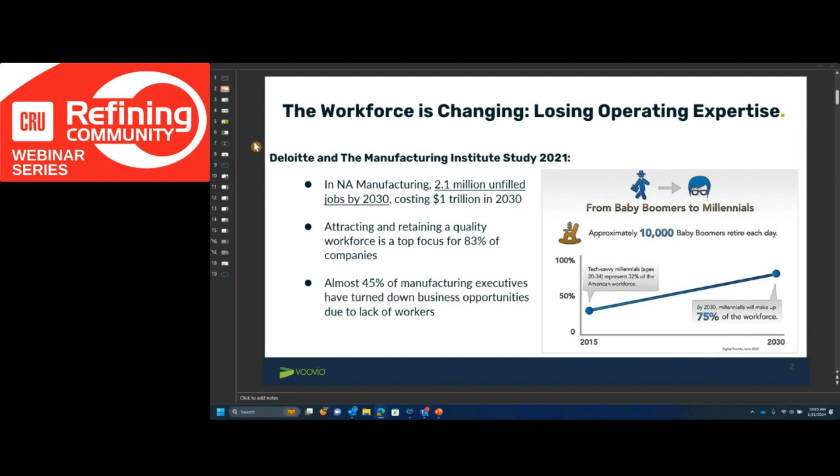So let's talk some more about some of these challenges the sites are seeing, specifically with the baby boomers leaving the workforce and the new generations moving in. What our customers are telling us this transition is causing them is a significant loss of knowledge. Within the industry, it's referred to as tribal knowledge. It's that knowledge, those process nuances where when you need to start up the plant or bring the plant to a hot idle, it's those nuances that only a few people know.

So that's challenging the plants on maintaining the high levels of production. It's creating a lot of inefficiencies with those few subject matter experts, because not only are these plants relying on those subject matter experts to keep the plant running, but those same SMEs are being asked to train the new employees in the plant process. So again, it's really taxing those subject matter experts.

In addition, when a new operator is onboarded, because the plant is running and because the SME is not always available to train those operators, what we hear from customers is when an operator is qualified in their job, they're probably only knowledgeable of that job less than 50%. We've heard numbers of 30%, 40%, because they're just not able to experience the starting up, the shutting down of equipment, et cetera. So what that leads to is we have inexperienced operators, ones that haven't seen the significant events in operation, training the next generation.

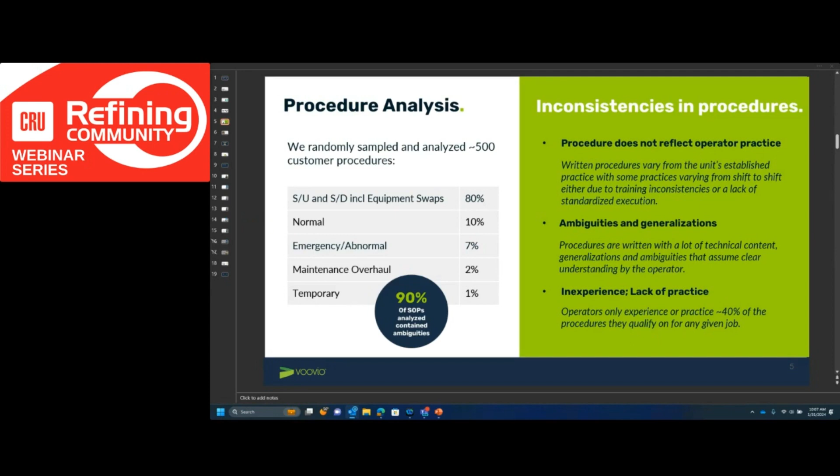So what we at Voovio identify as critical for the frontline personnel is procedure clarity, and we highlight that in the next slide. What that is are clear and concise actions. Think of this as a pilot's checklist. If an operator is going to perform a task, instead of ambiguous or general steps, clear, concise actions on what is supposed to occur in that next step, one action per step.

And then how do you enable that operator to visualize what they are supposed to accomplish in the field? So giving them the ability to visualize, building that muscle memory. And then lastly, it's learn by doing. We're going to talk a little more about learn by doing and the ability to build that muscle memory.

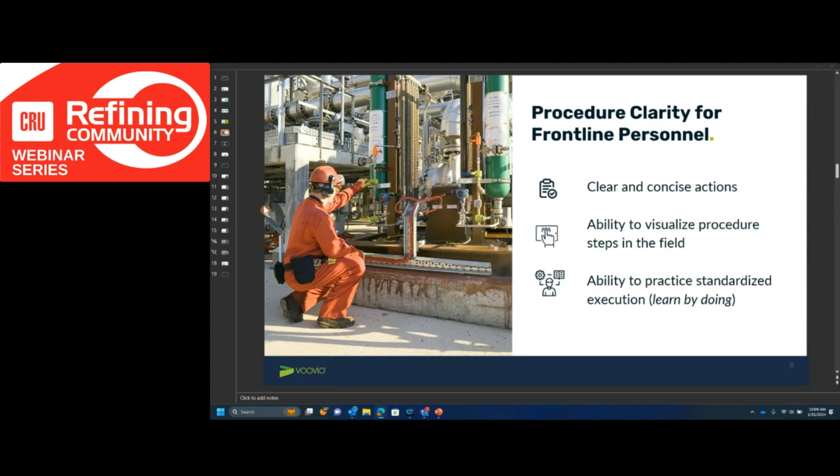But from here, I'm going to turn it over to Clint and let him talk about how Voovio builds that muscle memory within operations and frontline personnel.

Thanks, Fran. I appreciate all the front end input, and exactly as you said, we've been talking a lot, and I think most people know how difficult it is to learn in a new plant. Even people that have been in manufacturing for years, like myself, I'd go to a new plant, and until I was there 6 to 12 months, it was really tough to contribute until you've traced all the lines, walked out the unit operations, and really understand it.

So what we're going to show here is how Voovio is able to shorten that learning curve and make that material available at their fingertips as long as they've got access to a web browser. So I'm just going to show you guys quick the view of the system, the simulator, what we have.

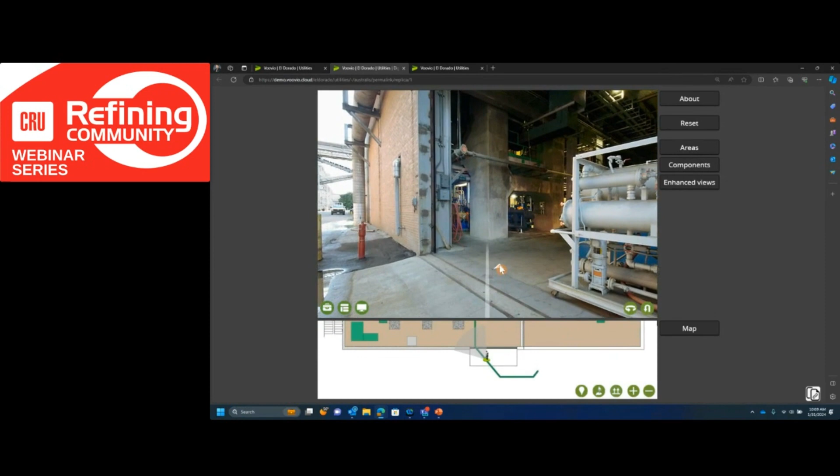So at its core, at its base, the foundation of the Voovio modules that we're going to build the simulator on is the digital replica. As you can see here, our replica starts as we walk into a unit. And you can see as I walk through, this is not a rendering, this is not a 3D scan. This is my plant, or a plant that one of you guys could work through.

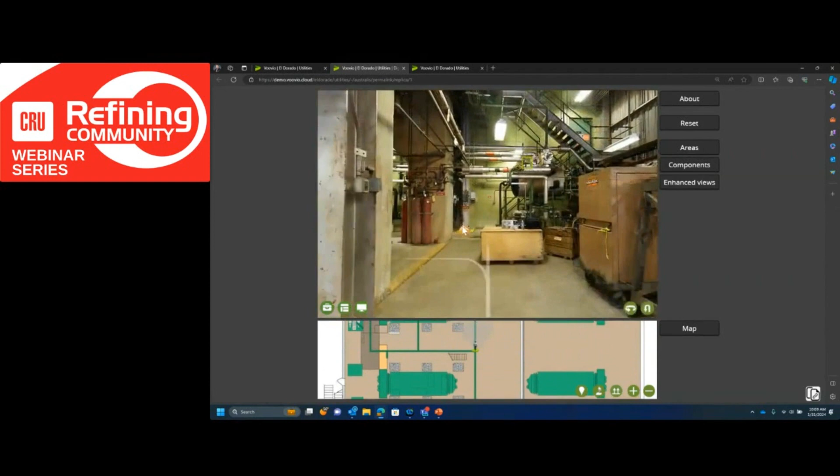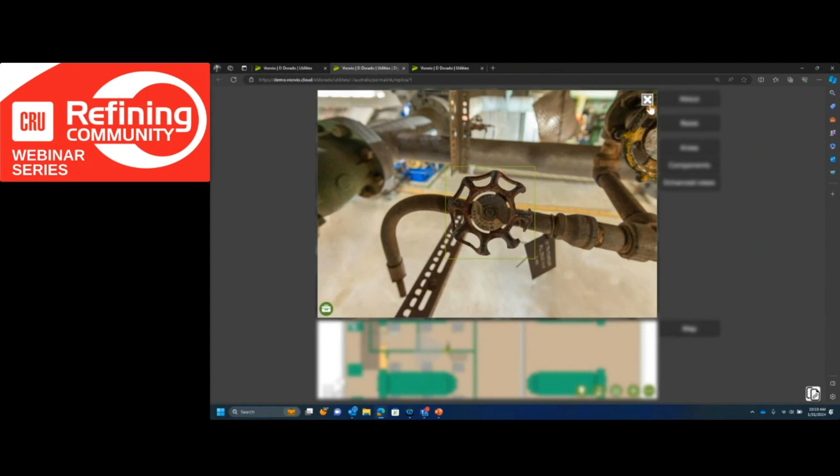That is one of the advantages of having Voovio, is that we use actual photographs of the equipment, which means operators will see and touch, remember, and be familiar with the equipment that they touch every day.

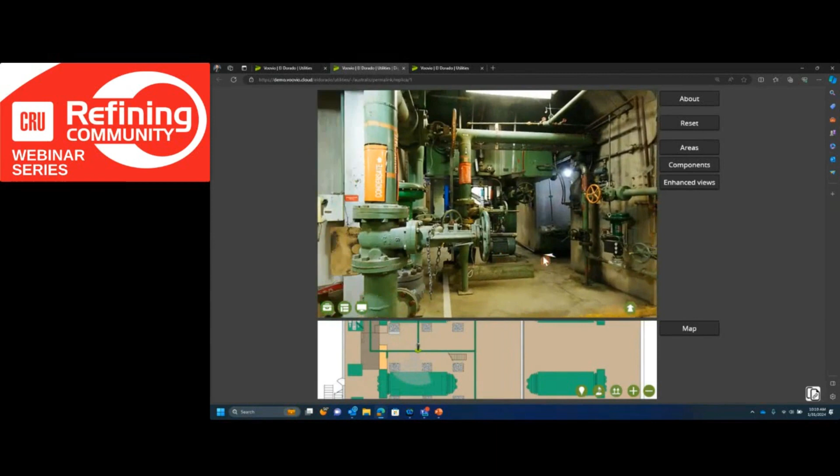In addition, we've got the capability to interact with this equipment. As you can see, I'm working with this damaged hand valve here. So we can go through, move. I've got the same degrees of freedom, looking up, looking down. I can stop, look around, see my entire plant as it exists.

In addition to being able to look at my plant, I can look up and search any of my valves, those valves with odd names from days gone by, or that have grandfathered names that may or may not make sense, or the upstream valve from wherever. We catalog and document all of the equipment in there, and it's also searchable.

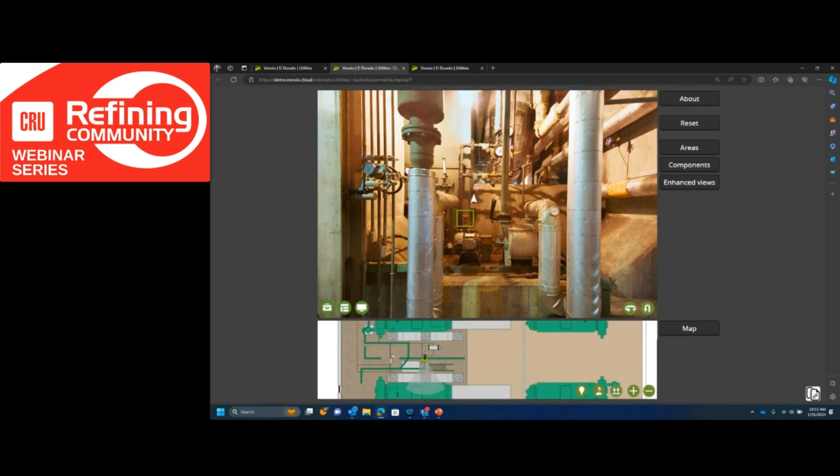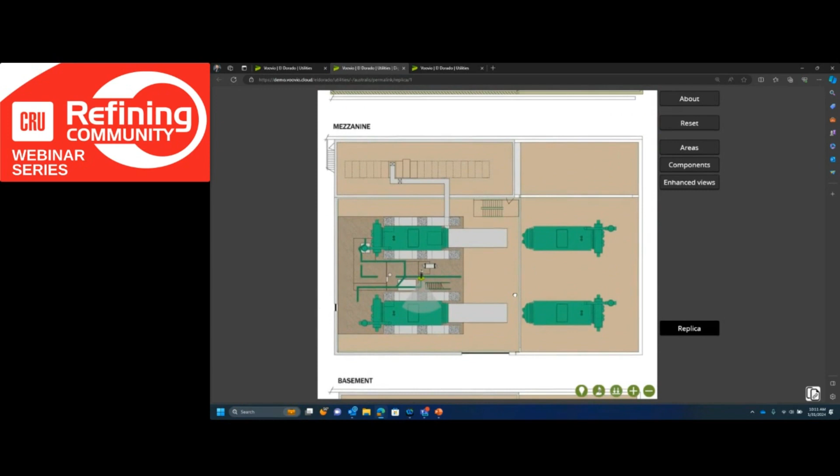So you can search by a tag ID. When you select such a valve, it takes you not only to that valve in the image, but also in the map view below. As you may have seen this map here as I was moving, this just helps orient the operator or user to where they would be in the plant, at the location that corresponds to the valve above.

Again, if you don't know the tag numbers, you can search for bypass lines, and all of the bypass lines would come up. You can select the valve you want, and it would take you to a manifold or a piece of equipment where that valve would exist, not only in the image, but also in the overview here.

So from locating valves, especially for new people to the area, or for infrequently performed actions or valves that aren't operated that frequently, you can see how this would drastically reduce time to procedure execution as well as learning for first time operators.

Another key element to Voovio, which really shortens the learning process, is what we call our enhanced views. These are extremely valuable for a lot of customers, because this is an actual use case from a customer we had, where they were training in an area that was extremely loud. They couldn't understand. So when the SME or the trainers would take the new employees to the area, train them, and ask them, hey, does that make sense?

Of course, everyone says yes, when they may or may not really understand it the way they need to.

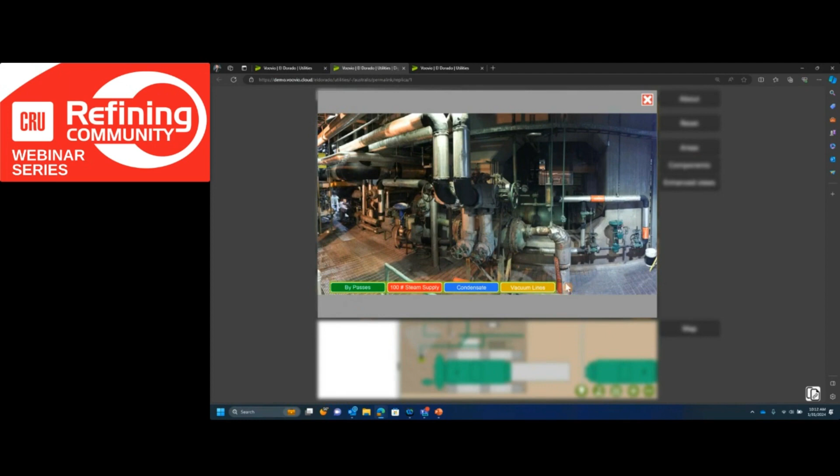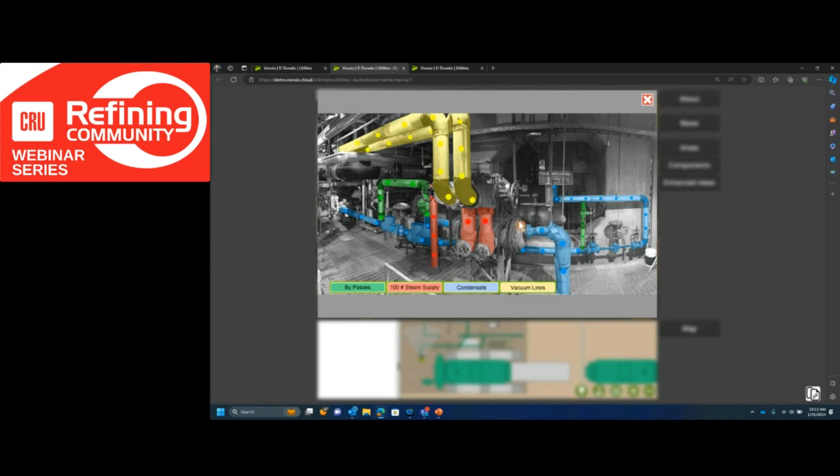But as you can see here, when we talk about the way the system would work, we can easily label these lines, and it makes it much easier to see how this process would work, where these lines could or wouldn't be isolated, and how the whole process works in general. So you can see how something like this would really help with onboarding or troubleshooting, in any event that operators would need to go out there and figure out what's going wrong.

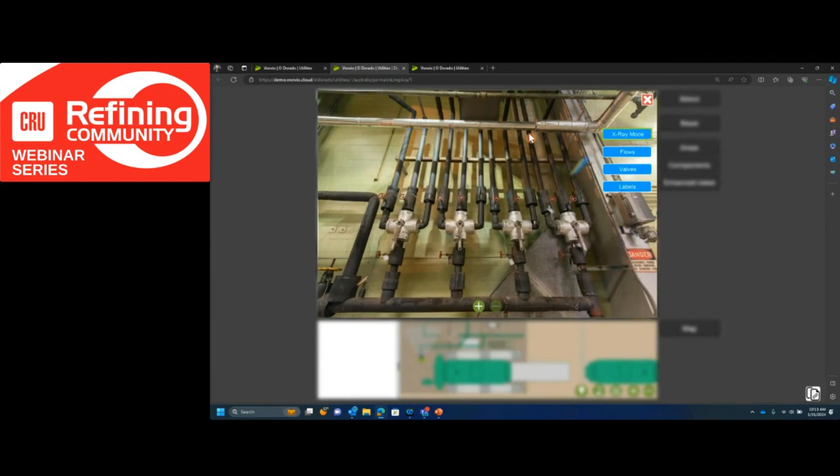And to take that a step further, again, we can make these interactive. So we have an X-ray mode. We have our X-ray mode flows, valves that you've seen before. Here, this has valves that are able to be interacted with. So if you'll keep an eye on this flow, as I interact with these valves, I can adjust the flow. So I can practice flow lineups, manifold arrangements, whether it be truck loading, unit startup, whatever that would be.

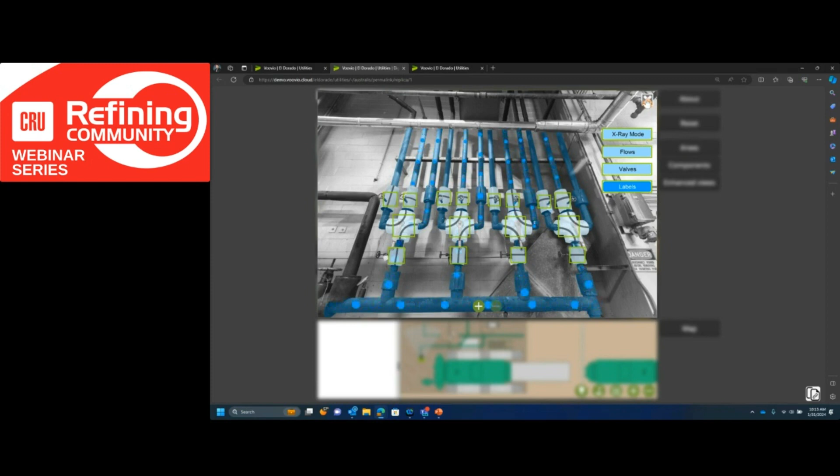I could sit here at a desk or in an office, or with a tablet in the field, just before I do it, go through those actions, go through those steps, and make sure the sequence I'm preparing to perform is going to be the correct sequence for the result I want to get, like I said, whether that's startup or shutdown or whatever. So again, that's just the overview of the system.

Where we really bring value is in the simulators. So what that would be, we've got several different modes. And what we're able to do here is take that same simulator, that foundation, and expand on it just a little bit. So what we're going to start first is with our guided exercise.

And the way I explain the guided exercise, if you can imagine, it's like having your subject matter expert, your best trainer, take a new employee, or anyone new to the area or someone who hasn't performed an action before, and walk them through procedures by the hand, step by step.

So just to get a view of the screen, what's going on, the items on the right, that'll look familiar - that's the replica with the map below. Now on the left, what we have is our action checklist. Like Fran talked about, that's where that procedure clarity comes in. We hit all those documents. That's our pilot's checklist. So those ambiguous actions, like 'line up the pump,' we'll break those six or seven steps down.

Down into: make sure your inlet valve is open, make sure there's fluid, oil in the seal pot, make sure the plug is in the offline pump. All those things that may or may not be included in the procedure will be included here with images to walk them through. The item to the bottom left would be the customer procedure, where we would index the step to that point in the procedure, as you see here. So step one in this one, go through, close this valve,

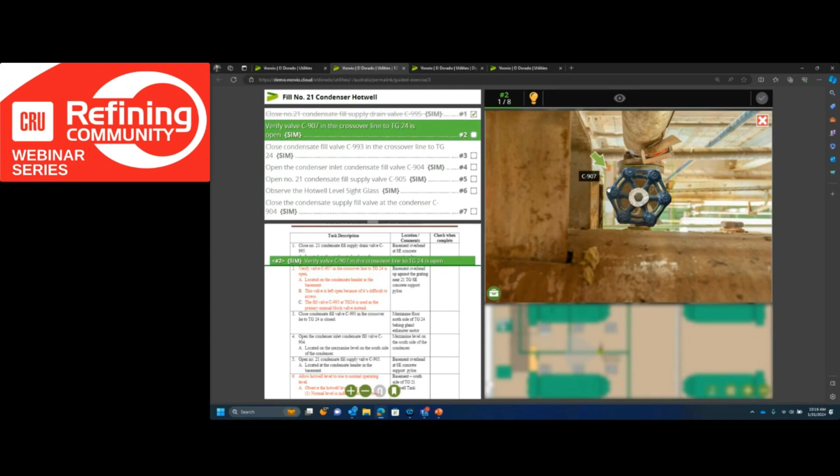It can be a link to an incident report. It can be a short video. We have customers do all of these things - any technique, any little tips or tricks that operators need to remember at the moment before they interact with this valve, we'd locate that here. This one just says, hey, we don't operate this valve much, we usually use a different one that accomplishes the same task. So all we do here is just ensure the valve's open, move on to the next step.

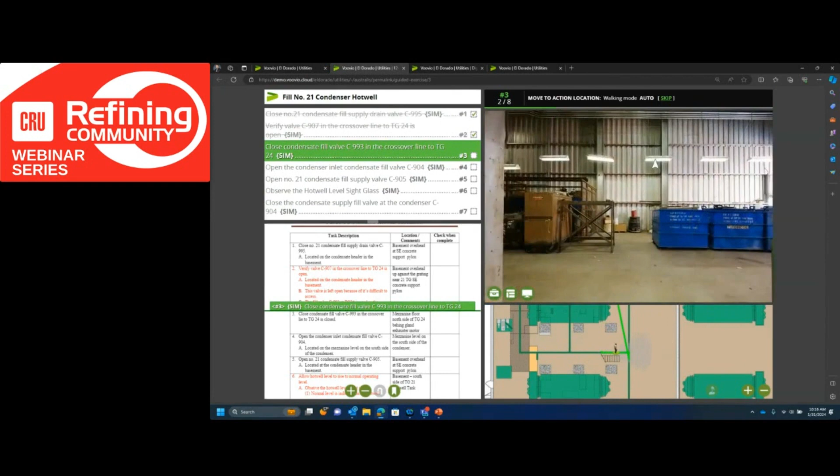And as you can see, the system is walking the operator. I'm not touching or walking anything. It's taking that operator through step by step until they're comfortable with that procedure.

So that's the front end part where you really get into it more. Okay, yeah, I can walk somebody through, but I could take a video and show somebody how to do that. How do I understand and measure knowledge? How do I get more from this than just showing or walking them through?

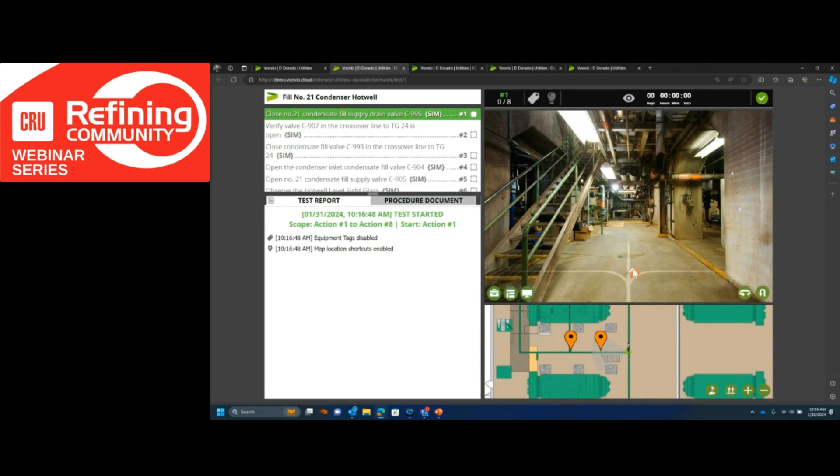So now to do that, we're going to go into our test module. So now our test will actually work with the operators and see what do they know. So as you can see now, I open the module, I still have my procedure, it looks the same, but now I've got this test report. So what I'm able to do, what I must do now as an operator, is I must move myself.

So I have to know where these actions are. I'm allowed to make mistakes. I can select any valve I need. As you can see, I was able to walk through that first step and get it correct. Okay, well that's nice. What happens if I make a mistake?

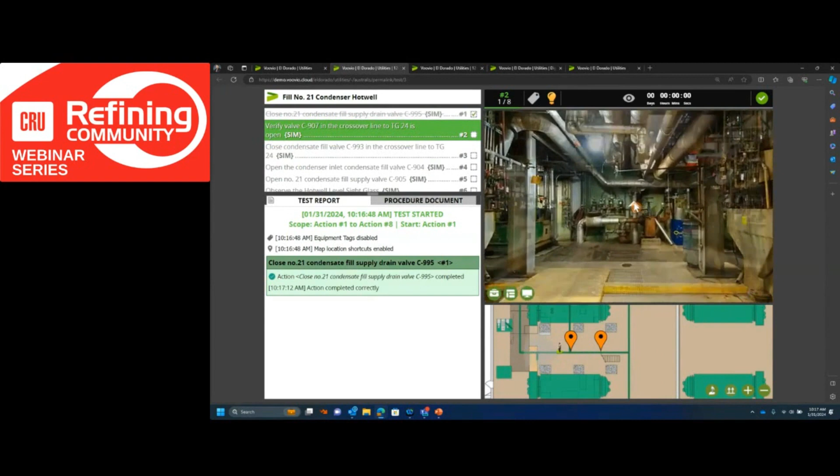Let's go down here. I think step 2 is to open this other valve. I'll get confused, I didn't open the knowledge snippet or remember. So immediate feedback, not waiting to get the test wrong and get my grade back the next day from the training coordinator. I get the feedback immediately here, and it says okay, I interacted with the wrong action, the wrong valve, didn't even look at my knowledge snippets.

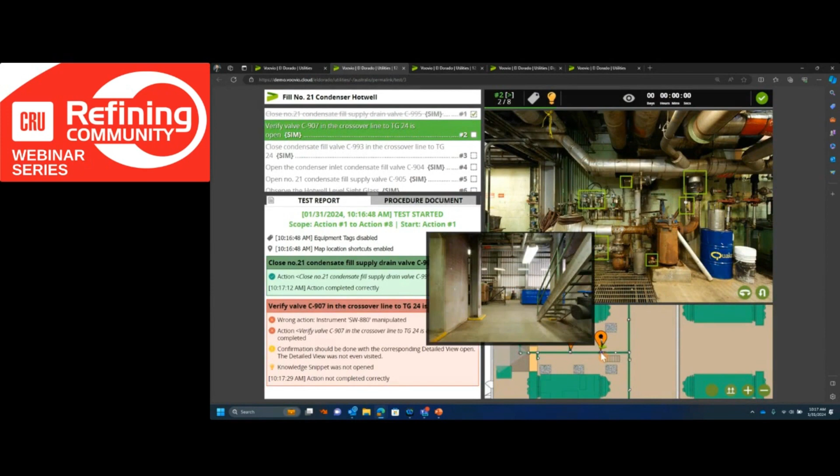But since it's a simulator, I can either review, which takes me back to the guided version, or I can try again. So I'll go try again. I'm gonna come back. Oh yeah, that's a knowledge snippet. It's that valve I'm not supposed to interact with. So I'm just gonna check that it's open.

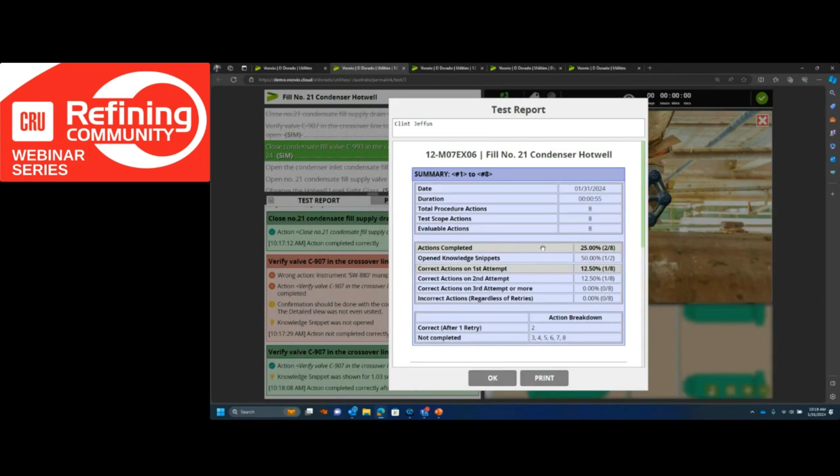And again, as you can see, it identifies that you got the action correct after 2 attempts. So everything that the operator or trainee does as they go through this gets logged and cataloged, so you can track and get a procedure report at the end where you can see how many items I've done, how many I still haven't completed. And the training coordinator, or whomever, would get a copy of this report after it was assigned to the operator.

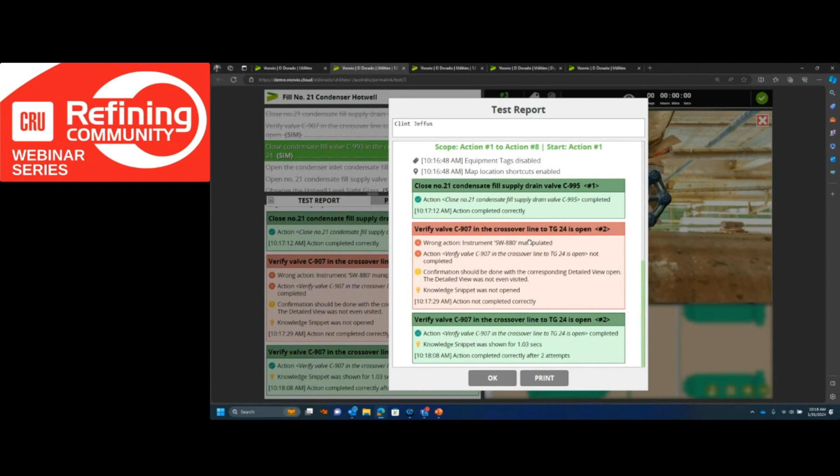Here's your grade summary. I can pull up those test reports for completed tests as shown here. Some knowledge snippets weren't opened, but they were trained well enough anyway. Whatever the case was, they were able to get enough repetition that they didn't need that, maybe, I don't know. So that's one value add.

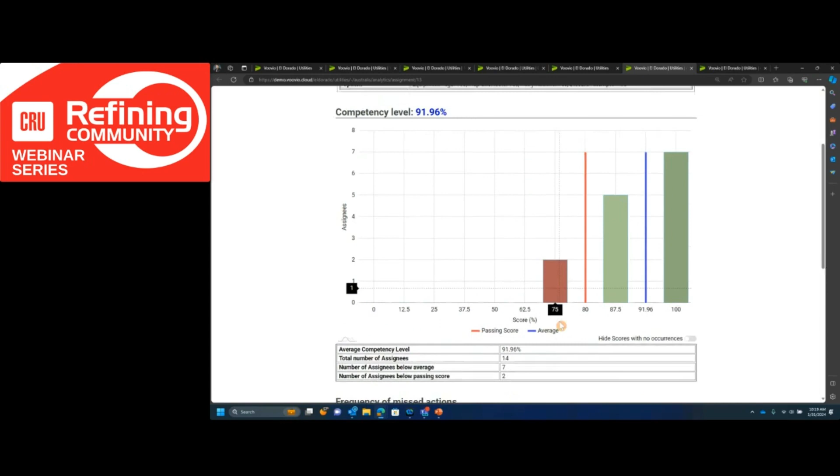Another is driving a little deeper and getting your overview summary of competency level, but also your frequency of missed actions, where you identify gaps maybe in procedures or chronic training losses or gaps where people aren't understanding, more than 1 or 2 occasions, which leads you to think maybe we need to change something. Here's an overview summary, a grade summary, minimum test, average scores, 2 people that didn't pass. So maybe we want to concentrate on this group here.

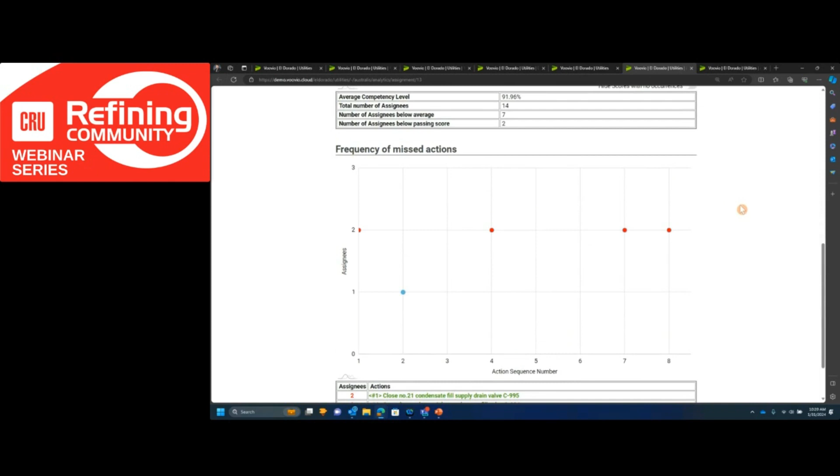We also have a frequency of missed actions table. This is able to direct us to the items that were missed. So this one says, okay, here are our most frequent missed actions. Let's go and see which one of those. Step 4 was missed a couple times. Let's check that one out.

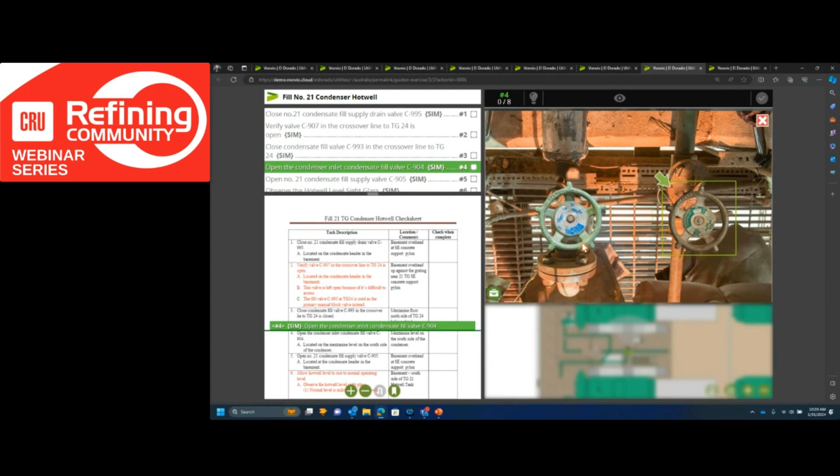So I can click that link, jump in here. And again, if you remember, the test doesn't have the arrows. So I can look at this and know that, hey, in a test format without the arrow, I could easily see how someone could get these confused. So I can change those steps, I can change the valve color, I can increase labeling, do whatever we need to do, a little more field hands-on training, to make sure they understand the difference in these valves and can correct that the next time.

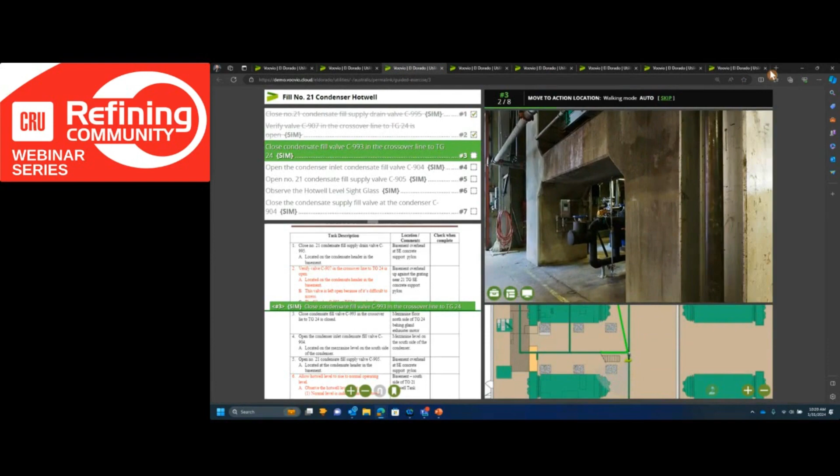So that's just a quick overview of some of the things the module's able to do. Again, we'll have questions at the end to let you guys weigh in. But as for now, I'll give it back to Fran and we'll commence with the presentation.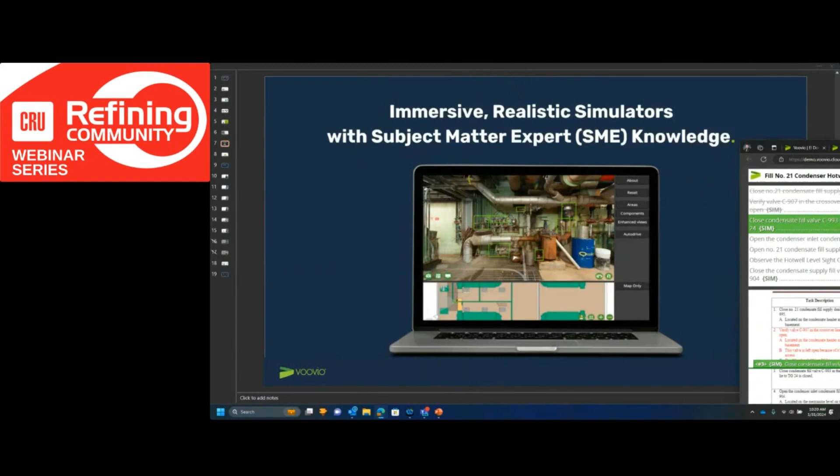So again, great overview. And what this learning pyramid really points out, some folks will say this is the new generation and how they learn, but really most of us nowadays, we learn by doing. We learn by seeing and then doing. So reading really is no longer the norm. I think back, anytime I'm working on something at the house or on my car on a weekend, I'm looking for a video to follow and to practice, so I can learn by doing versus reading a procedure.

So this learning pyramid really hits home with giving that operator a simulator, something they can practice. Digitizing a procedure really doesn't change the method by which they're learning. Giving them the ability to practice prior to execution is important for building that muscle memory and affording them the opportunity to see it in the area prior to actually performing in the area.

So with that, I'd like to jump into some case studies. We have several, we'll cover maybe 5 or 6 and then open up for questions.

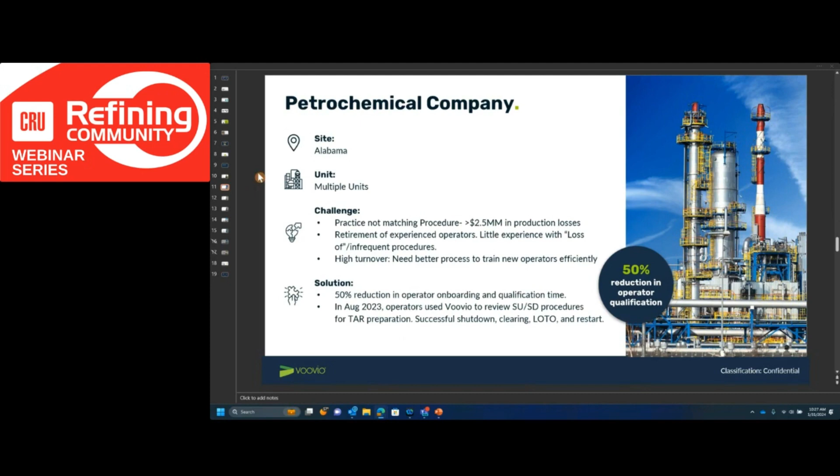The next one I want to talk about is another oil refinery in Montana. They were having a challenge with their logistics unit. They allow third-party drivers on site to perform the loading of their products. So they invited us to the site to capture the loading of the trucks.

And what they are doing now is, since we are a web-based solution, before the drivers come to the site to pick up whatever load they're being asked to load, that driver will go on to Voovio, practice loading of the product. Let's say it's asphalt. They will practice loading asphalt, and then they are assigned a test. That third-party driver needs to demonstrate competency prior to being allowed on site to then pick up that load and load at the site.

You can see here that the reliance on the customer operators was reduced by 75%. And in 2023, this refinery was able to train over 400 drivers on loading specific products at the site.

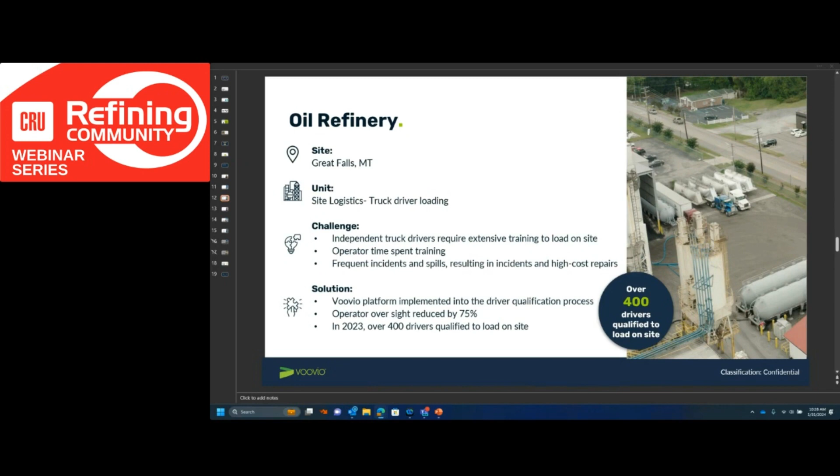So just a quick couple more, and then we'll jump into a Q&A.

Here's a gigafactory at an automotive facility up in Austin, Texas, where they're doing battery cell manufacturing. Their biggest challenge, a little different than others, was rapid scale increase. They're onboarding people every week. It's not so much loss of knowledge here, but limited knowledge, where people may have 2 weeks to less than 2 months of experience. 2 months would be a senior person training newly onboarded people. Those of us in the industry know how much we knew after 2 months. So when you're losing that knowledge, you don't have the best practices that always get passed on. That was their challenge.

They didn't have the tools to onboard such a rapid, massive group of people. So they were taking those 2-3 month people and having them train other new people. The rate of change when you're adding that many people and scaling a site that quickly is the speed at which procedures and best practices are learned and then applied.

That's another value add of Voovio: the updatability. When something changes or a procedure's modified after we've done the photo shoot, if it's as simple as a valve swap out, those changes can be made within 24 to 48 hours. If we've got the images, we can hop on a Teams call with our team and get those updates put into our learning system within a day or two. So the ability to increase agility for rapid expansion or rapidly scaling businesses is another value proposition Voovio brings. It's tough to match because of the method we use with JPEGs in our solution.

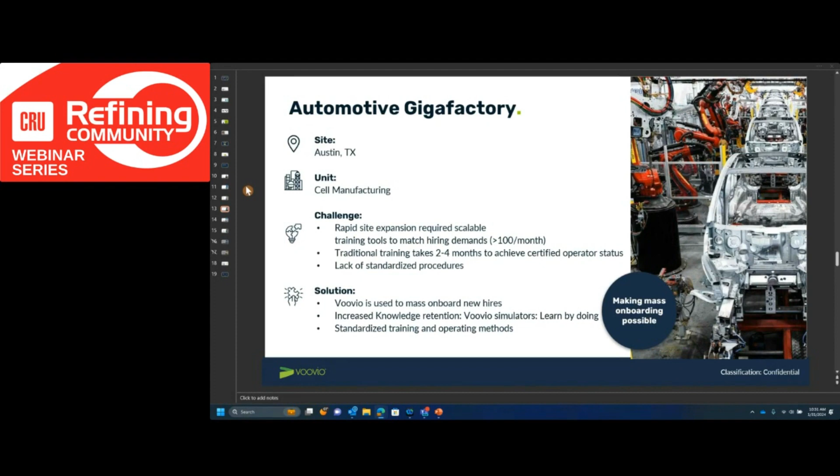The next one, another very large chemical company down in Geismar, utilities area, was another onboarding case. The qualification was basically the trainer signed off - they walked through, did a quick checklist, and signed off. Then they got released on shift, and the company was still having issues with pump failure and other errors, leaks in the unit. Competency among even a lot of the qualified people for actions performed irregularly, every 3 to 4 months, was extremely low, because they'd had turnover, or on a multi-unit site, people would bid out and change units. So even if they're not leaving your company, if they're changing area of responsibility, that's also a form of turnover, even if it's not documented.

So Voovio was brought in and put into the onboarding curriculum for some key equipment for operators. We'd also do refresher training before they performed some of those irregular activities, to eliminate what we call maintenance bad actors and those damages and costly repairs to equipment. That's the same company Fran mentioned before - they repeated their achievement of 50% time reduction spent by SMEs to qualify new operators.